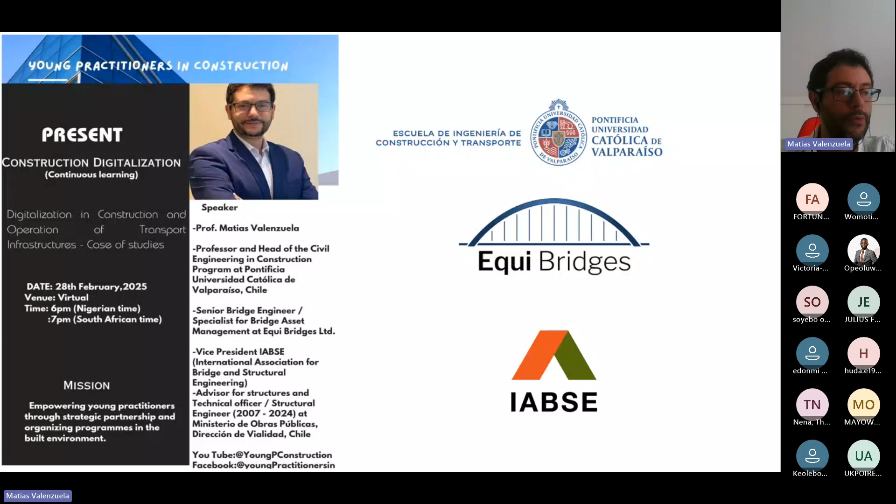So let me start with the development of what digitalization means in Chile. The first thing I can talk about is BIM, Building Information Modeling. And why that? Because, of course, Building Information Modeling is a methodology for collaboration between different stakeholders in construction, during design, and of course in operation. But also you have different software and different technology that you can implement in order to improve the BIM methodology.

In 1975, it started with the publication of BIM. Then we moved to the ISO STEP that regulated all the model. In 1994, I'm talking about all around the world, it started with the IFC development, and in 2000 we started with Revit, and then moved to the first experience in Europe, for example the case of Finland, and in 2007 the US also became part of that.

What is important here is that we are moving in several ways, and collaboration is something important. You can see that in 2018, a mandatory use of BIM, for example, in Spain for public tenders, requires a specific way of being collaborative during construction, collaborative during design, and also pushes the technology a little bit.

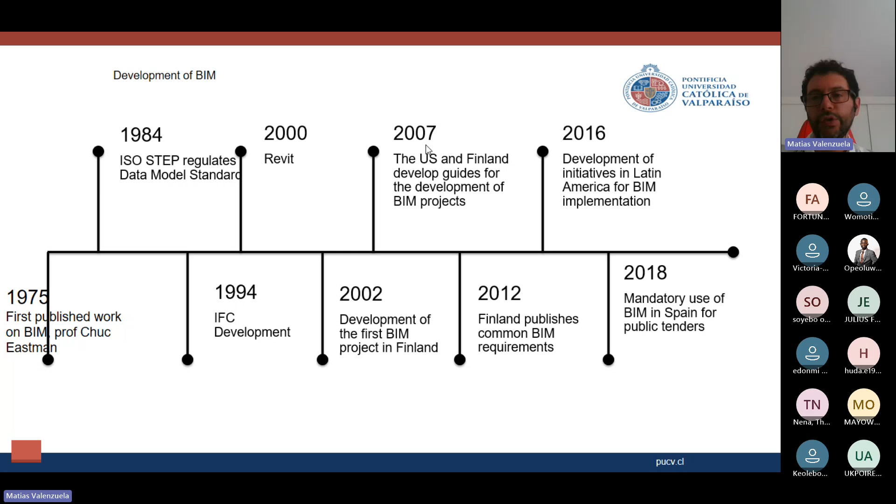Something happened in 2016 in Latin America, because that year we started with the implementation of BIM in several ways. Let me move to this map of South America, and you can see here that we have frequent use of BIM in the case of Chile, that long narrow country, my home, Peru in the north, and Brazil. But it's also preliminary or the first stage of the use of BIM in Colombia and also in Argentina.

That is something that I realized during the strategy of use of BIM in Latin America in 2023.

If we want to know more about this use of BIM, you can see here in this map different ways that you can approach entities or associations that promote BIM in different countries. For example, in the case of Chile, Plan BIM is one of the most important, and this year is the last year for the set of BIM in the different structures. But you can also follow this in the different countries of South America, or in general in Latin America.

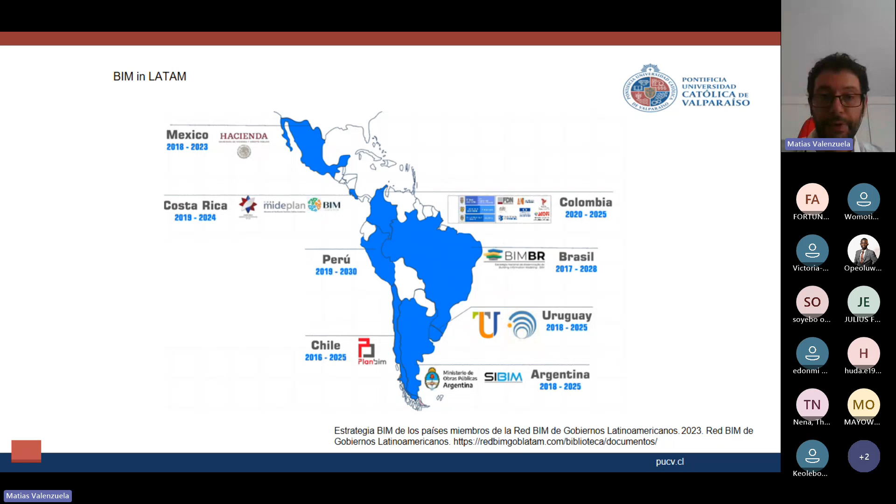So let's move on to why BIM is important, and maybe something we need to connect with the technology, the use of digitalization. You can see here the goals: improve quality and efficiency, increase industry productivity, and achieve savings and reduction of inefficiencies in the life cycle.

That is very important. Life cycle means design, construction, and operation. So it's something we are talking about right now - we are not focused just on construction. If you are in the field of construction, you have to see what happened in design, and also you have to know what happens during operation.

And that is BIM: transparency in information and project traceability, fundamental for construction, promoting collaborative industry, providing better tools for participation, and predictability in execution times and cost control. All of that really, really applies to construction.

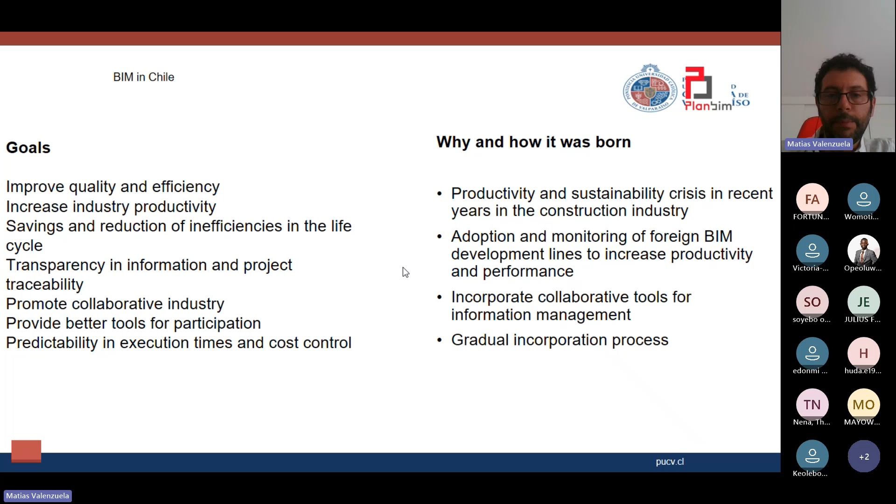So BIM is a methodology that moves us in that direction. Here you can see what happened with BIM in Chile in 2016.

That makes some sense, because the collaboration in construction through technology is something that needs much more energy - you have a crew, a lot of workers who have to be coordinated and have to be taught or trained in order to get all this information.

That is the reason why the current focus of BIM in the roadmap of BIM in Chile for 2022-2025 is to try to implement this in a better way in construction.

So it means that the BIM environment, the collaboration through technology, doesn't only have to be in design, in architecture - it also has to be in construction.

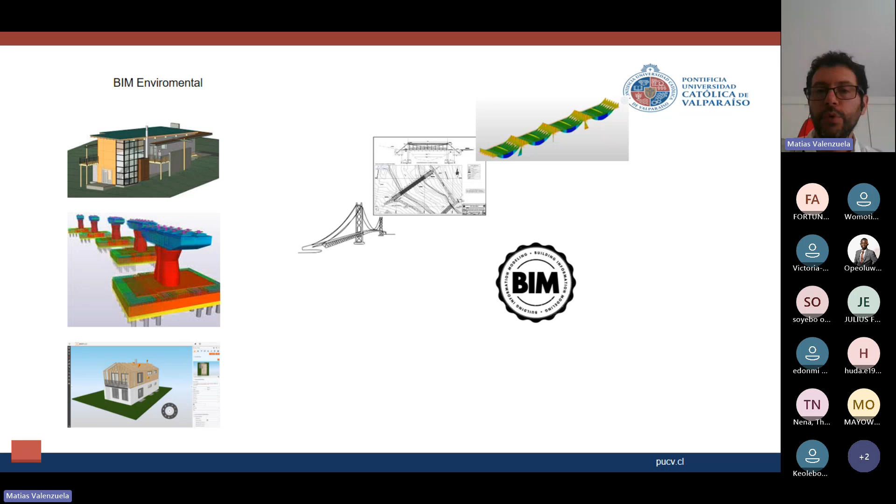So this is the life cycle of the use of BIM and digitalization. Of course, drawings, structural models for design, local model design - yes. Probably then you have started to get some information from that model for construction. Then you have the program, the planning of that. You also need the cost and how we can implement that during the construction phase.

But also the repair - what happened with the model of damage, what happened with operation and the key KPIs of this structure during the service life. That has to be BIM, and that's how we can understand the use of technology.

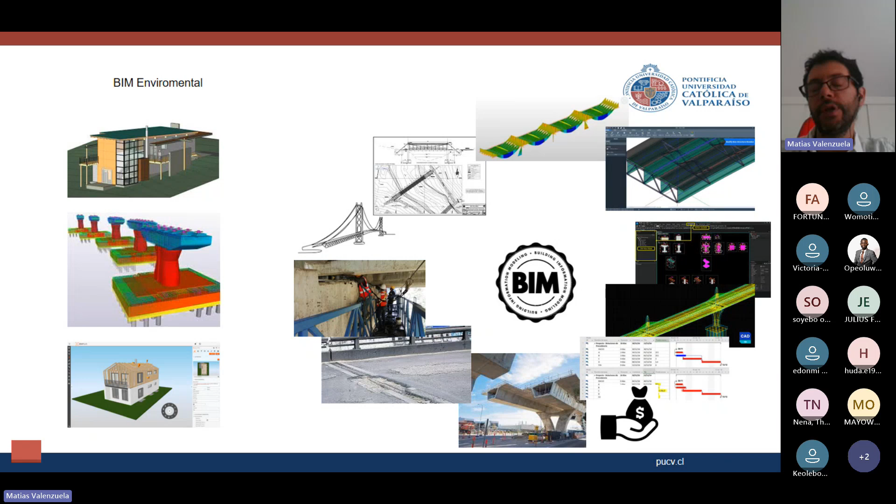We don't need technology just for technology's sake. We need technology for a specific aim, a specific goal. And that is better productivity, a better way for the worker, the designer, the architect, and even the users to understand.

So let me show some case of study, what we are researching right now in Chile about building, about transportation, to link and match between this topic of collaboration using BIM methodology and digitalization, technology, equipment, and so on. So the first step is, okay, what is the most important challenge of this?

The most important challenge is coming from this research. It's research from one of my PhD students, Ali Bihendi, from AUT, Auckland University of Technology in New Zealand, and of course in agreement with the Pontificia Universidad Católica de Valparaíso in Chile.

And the focus is, if we want to move to the enterprise, to the construction companies, and provide digitalization and create a transformation of that, we need to understand which kind of problem they have to implement the digitalization.

That is the reason why this is focused on a human-centric approach for, in this case, the Chilean case study. And this is linked with a national project that is called transference, knowledge transfer of BIM technology for Chilean construction companies.

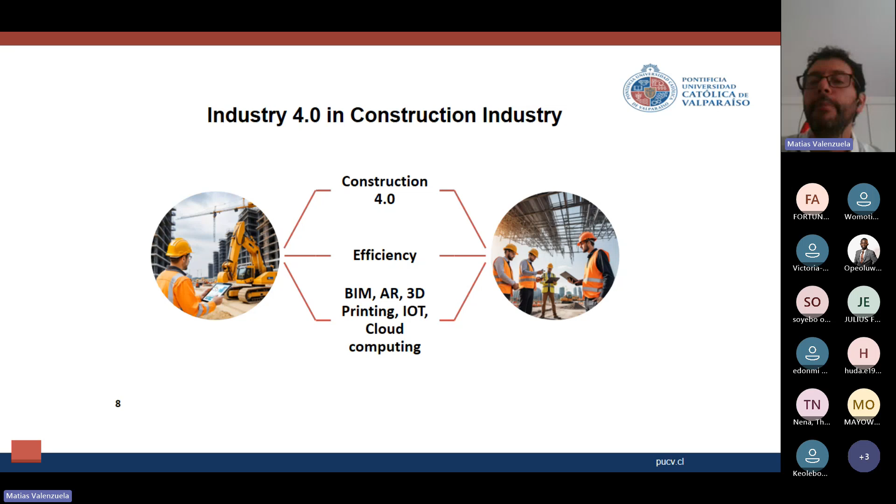And that means we are talking about Industry 4.0 in the construction industry. We are talking about efficiency, and we are talking about BIM, augmented reality or XR, 3D printing, IoT, cloud computing, and much more. So how can we use that, how can we implement that?

So it means an implementation challenge, because I'm coming from Chile. Chile is not a developed country. We have a limited budget. We have several problems getting this kind of technology and implementing it in all of our companies. It's not something that can probably happen like it does in the first world, Europe, US, probably.

But in our country, we have to understand how we can implement it in a cheap way, in an intelligent way, in a smart way, you know.

It is not easy to implement as best practice. All the concepts that have to be included, waste of money—look at that, 900 billion wasted in 2019.

What happened with another important thing, fear of being replaced? As I mentioned, what happens with, in our case, the engineer, the workers of construction—will we be replaced by robotic digitalization, or will we provide a new skill that has to be provided in the sequence of construction? Probably that is the right direction.

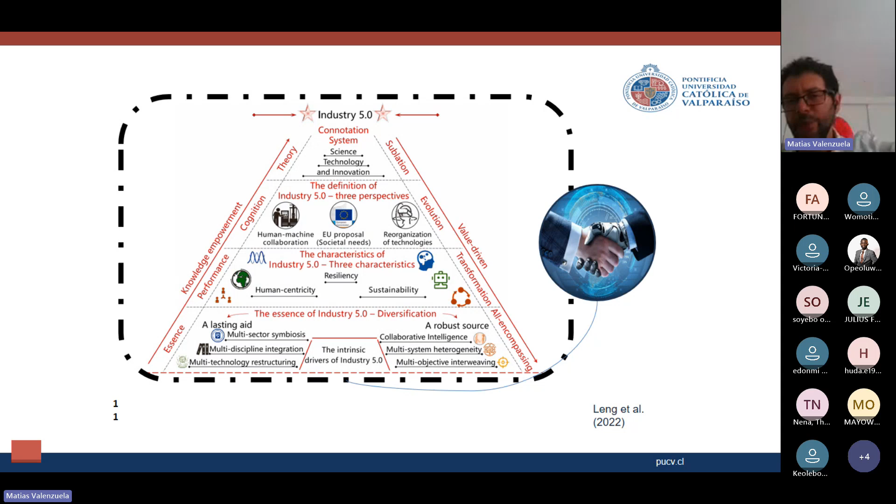So that is when we're talking about digitalization, but there are many words here, many concepts that we have to analyze, of course, and the idea is to simplify that.

And if we try to move in that direction, the state of the art is something you have to know. For example, the different ways that we consider our society: sociocracy, the human-centered organization, human-centered design, and humanistic management. I can provide here several references.

And of course, you can move deeper in that way. So the need for a new approach means that we have to make a change in the way that we normally use and provide the service of construction, and understand that that will happen.

And the change means change management—how we manage that change inside my construction company. The leadership is moving, is changing, is challenging the leadership, and a comprehensive guide for construction organization leaders.

That is something we are focused on right now in Chile and New Zealand in this collaboration, in order to provide guidelines for all the companies. We are moving in a way where organization change management has at least three branches: the current state to a desired future state, the most suitable change model, and the support of leadership in this change management.

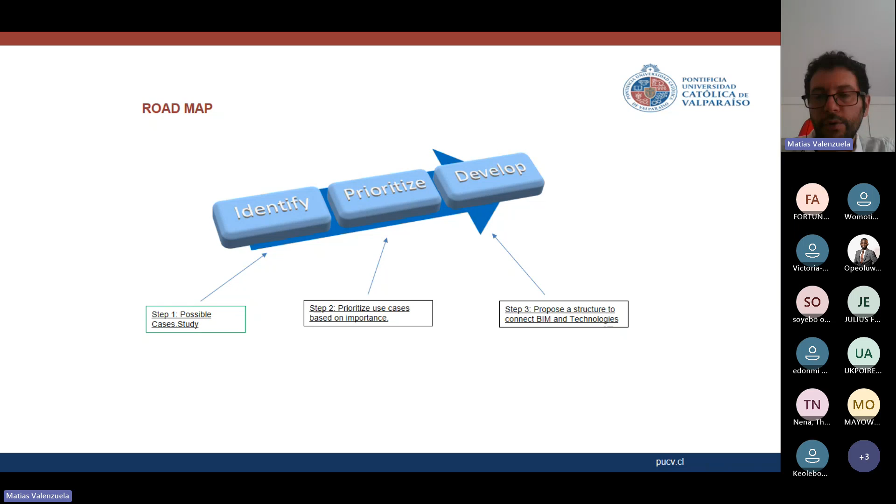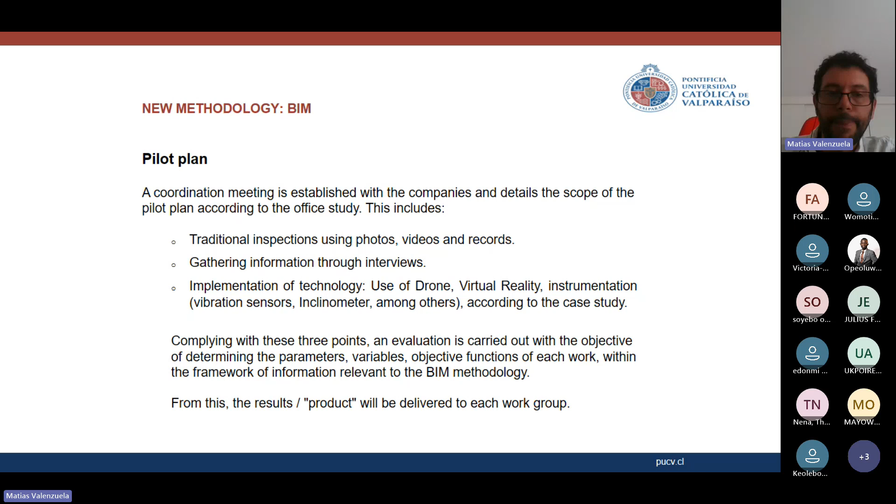So after understanding that, they used BIM for the modeling, 3D modeling, and used this during the construction. We implemented a detailed LOD 500 in a way to recommend improving not only the design and architecture point of view of the use of BIM. So moving there and going to the construction stage, all the work in terms of critical path and execution times was part of the important issue here.

Which other important technology did we implement? Construction and topography survey using drone - that was also included - and also the implementation of mixed reality. And that is part, of course, not directly for construction, but also for sale or post-sale, meaning how they can show the result of this construction process to the final client.

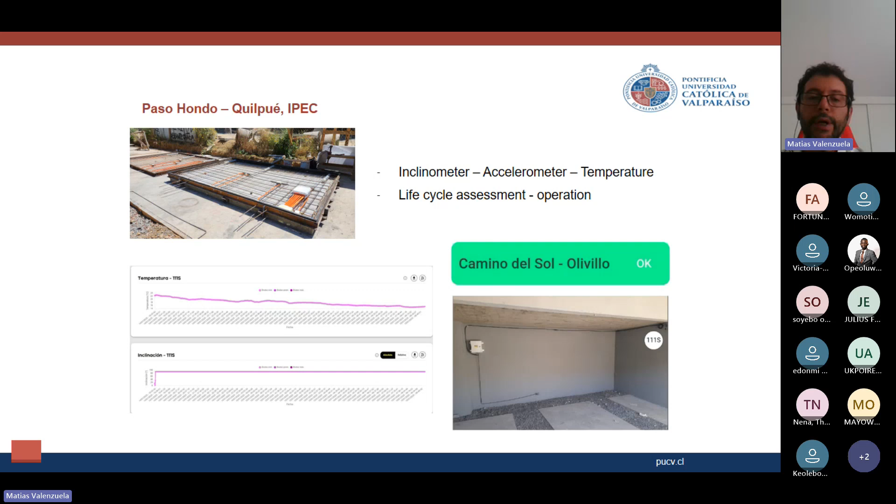Here you can see the different graphs that can be implemented. This could also be included in a domotic way, meaning it could be information provided for the user, or for construction management or operation management.

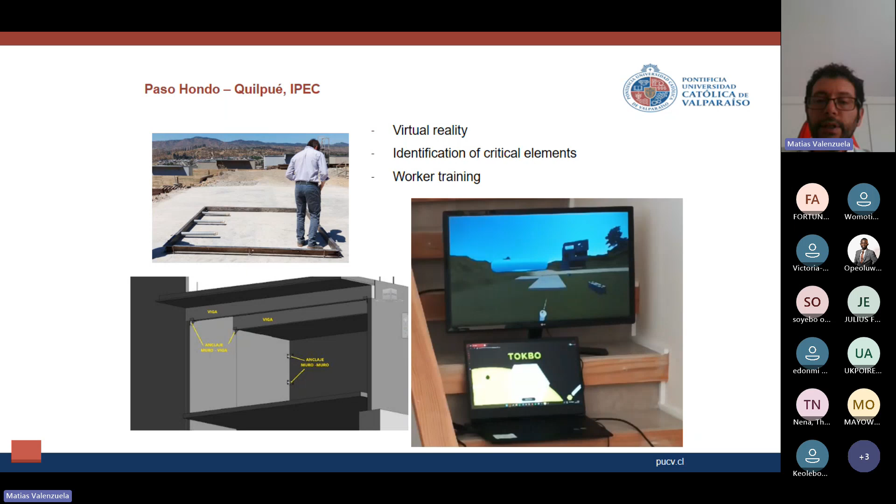So that was very useful, and probably something that should be considered for new workers at that stage. This is another project, for a building.

So the way we could improve the use of technology for them was of course through a survey, analyzing the problems they had during construction, and we recommended using a tablet-type mobile device including the BIM file, a BIM viewer, with an LOD 300 level for that.

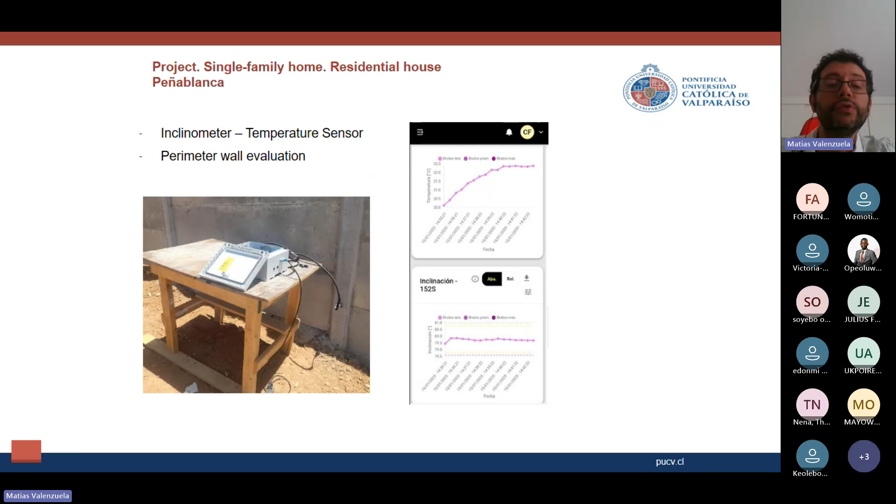We also use a temperature sensor in order to analyze if the environmental condition could also affect the inclination data results. We also used virtual reality, but in this case it was not really used for the construction stage. It was much more focused on trying to resolve the interference model, for example electrical or piping models, and showing all of that specific detail to the customer, the final client.

So the next stage, which will be during this year, is absorption. This year we will follow up with this project, and we will try to provide much more information to this company, and provide them with new technology.

For example, in this case, we are using this kind of integrated sensor. Of course, we are using BIM modeling software; in this case, we are using Allplan. It's a very nice and comprehensive software for BIM Plus, for operation and also for drawings. We also use drones with RTK workstation.

Okay, that is the first stage of my presentation, and right now I want to move in the minutes that I have left to the infrastructure.

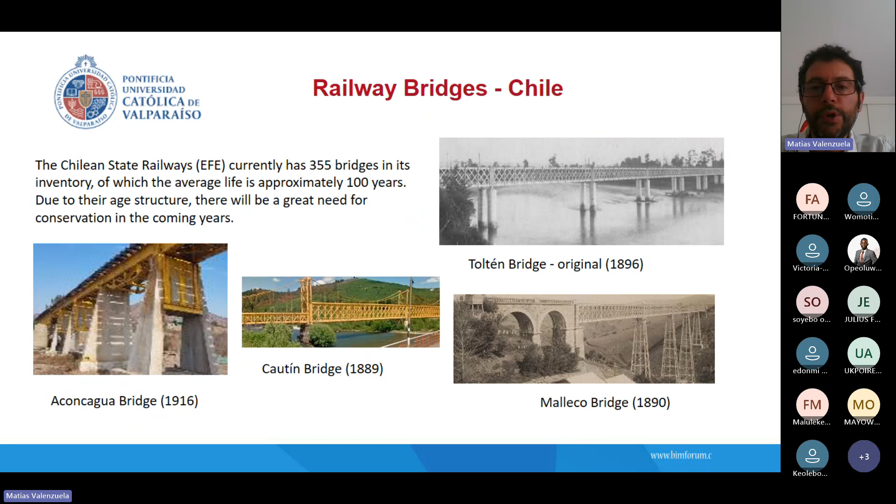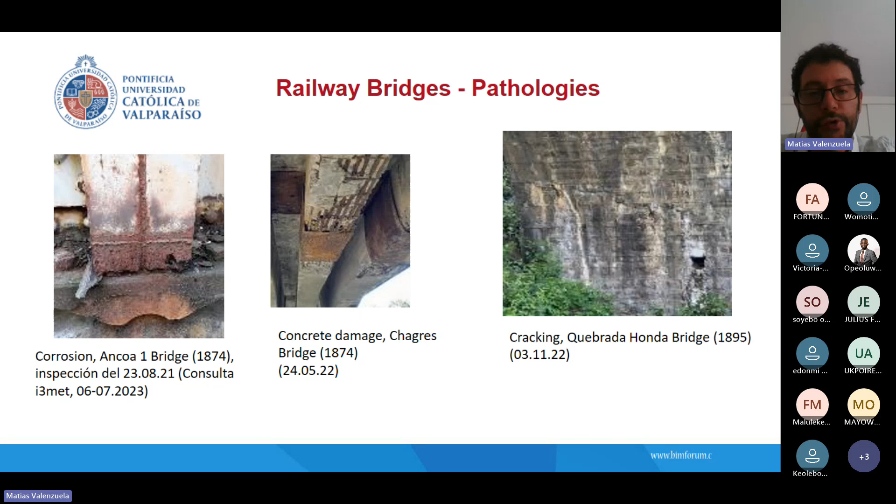Corrosion, concrete damage, cracking. So what happened from our side of construction, if we are talking about all these bridges, all structures, how can we provide our support from the side of construction? Of course, it's from rehabilitation, strengthening, and repair projects. In that case, construction is also part of the life cycle, in this case the operation.

So understanding that, and following our ideas of how we can implement technology and digitalization in this kind of problem, we were awarded another funding project. It's called Fondef IDEA 2024, Bridge Damage Monitoring and Prevention System based on a prediction model generated by artificial intelligence.

My acknowledgment for the team: the director here, Ricardo Soto, he is an informatics engineer. Also Alvaro Peña, he is from the side of mechanical soil. And you can see me here, I'm a researcher of bridges and sensors and all the stuff. And we have three PhD students, Jose, Marcelo, and Juniel, supporting all of this research. So I acknowledge all of the team.

When we started with this project, we talked about which are the research lines. So we focus on three clusters. The first cluster is artificial intelligence and data analysis, of course led by our informatics team. Early detection of anomalies, prediction of structural problems, and maintenance optimization.

The second cluster is Internet of Things. So how we consider data acquisition, continuous and real-time monitoring, which kind of sensor we are using, efficient data communication, advanced data storage and management. That is another focus that we analyze in this research project.

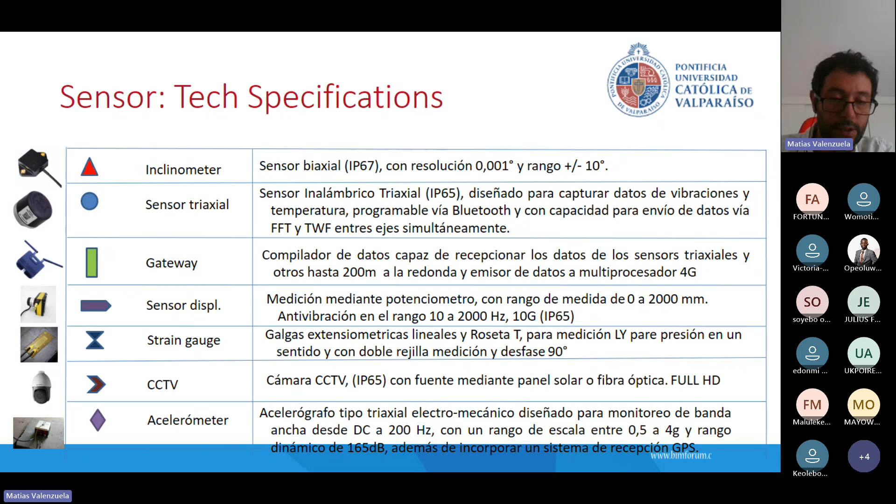Right now, we have already implemented just the accelerometer. And that is something important for Chile because one of the main issues here is earthquakes, and the bridge that we are using as our case study suffered a settlement due to earthquake solicitation.

But when you want to provide the right digitalization using sensor technology, you cannot just say, okay, I want to use an accelerometer, so use this specific accelerometer. No, you also need to understand and link the sensor, the technology, with the KPI, the key performance indicator that you want to measure.

So, for example, in the case of the accelerometer for our project, it is to analyze what happens with the soil acceleration, the mechanical soil acceleration, and also to understand the different modes of failure that can occur in this bridge. So this is a really important recommendation: if you use technology, you always have to identify the KPI and the target that you'll use.

This is an example of the location. Of course, this is not specific to this project.

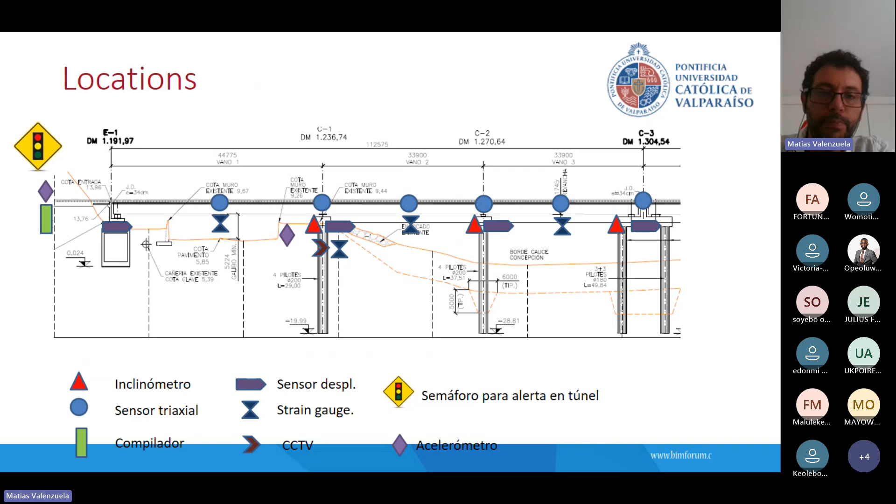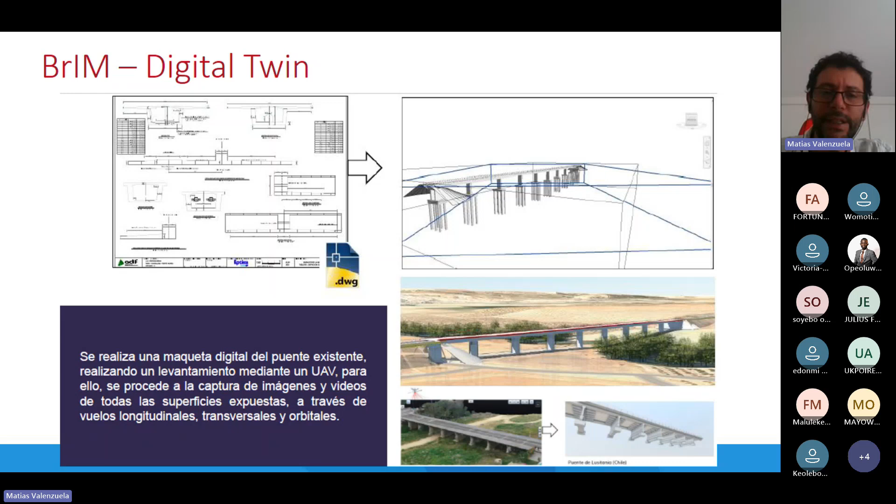It was a road bridge project that we implemented in the south of Chile. And of course, BrIM, Bridge Information Model, is something that has to be considered in this research project, as I will show you in this next slide.

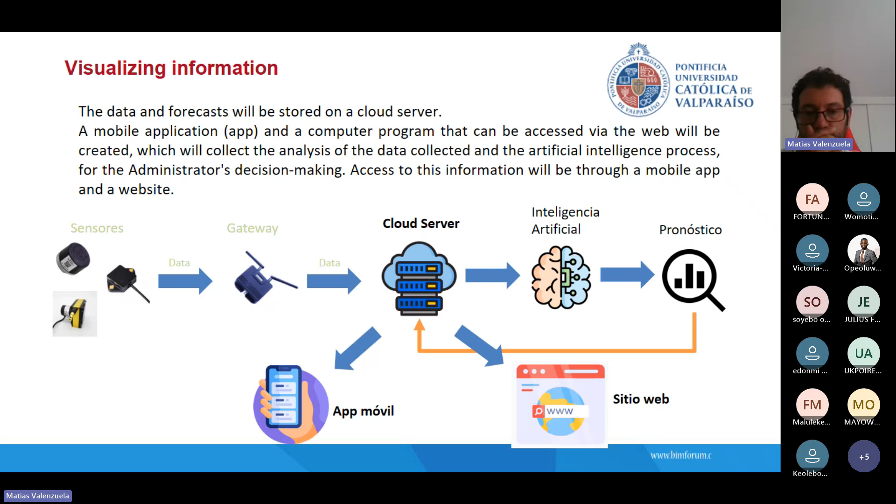Following this research project, we implemented this in a digital twin, BIM, and XR visualization at Las Cucharas Railway Bridge in Viña del Mar. Beautiful place here, a touristic city, a beach area, very beautiful here in Chile.

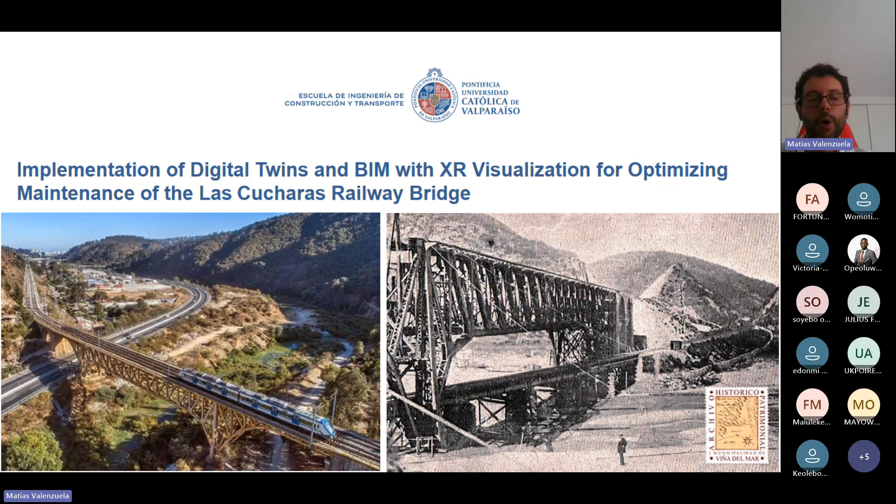Here you can see the survey visit used for the digital twin. Of course we need to go there to understand what happened with the different elements. In this case, the bridge is considered a viaduct with an arch bridge, as you can see in this photograph, and a truss bridge is the main part, the main span.

Here you can see our inspection in the railway area, in the bearing zone, and also close to the river. We used a drone for the digitalization, a DJI Phantom 4 RTK with a Hi-Target V30 Plus and controller, and Trimble for the scanning. Here you can see the preliminary result of that.

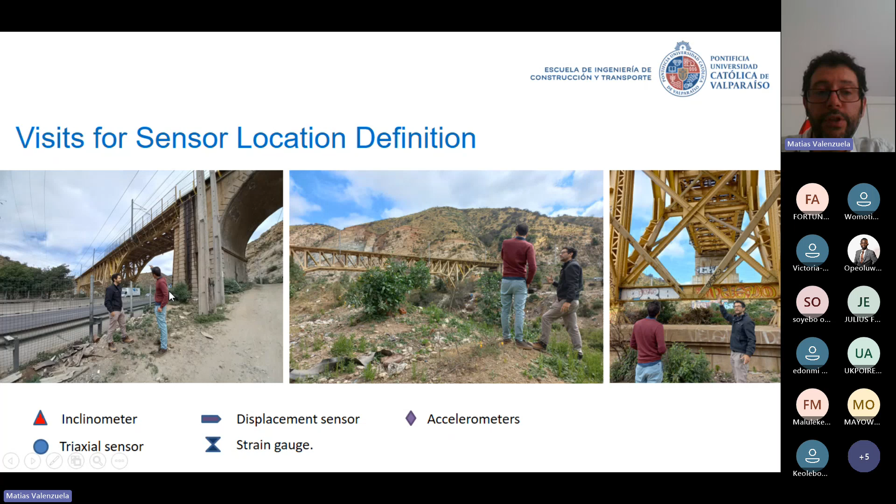We also had a visit for the sensor location definition here with a colleague from UPC, Barcelona Tech, Spain.

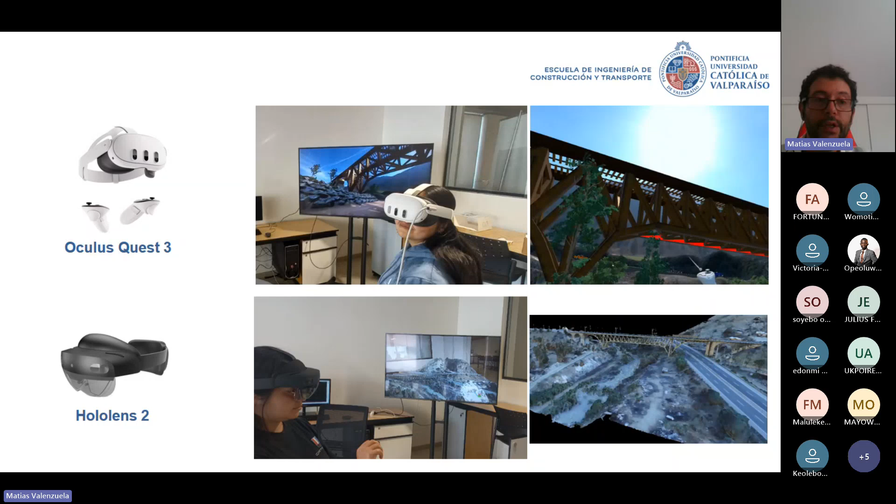And here you can see the gamification, which provides the virtual reality for the training of the inspectors. We use Oculus Quest 3 and HoloLens 2.

We created the digital twin with the first model using a photogrammetric survey, Metashape, Blender, and Unity. This is the second analysis, and the third one also with the topography.

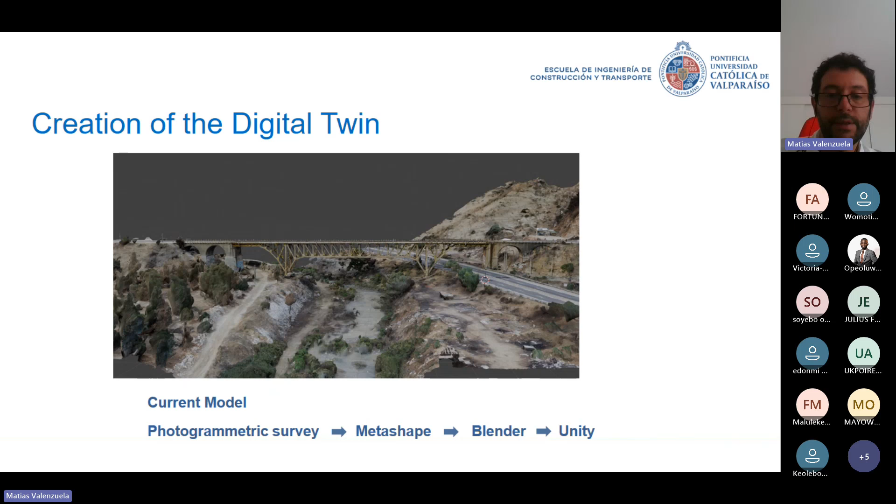This is really important for us, for example, for climate change, to analyze any kind of potential problems coming from the river, from scour, erosion, fires, or landslides, for example. So you can see here this.

The interaction with the digital twin also includes a route for inspection and gives specific training for the inspector with information about the drawing, information on how they can take photos, and information on how they can be safe during the inspection, for example, if the train is coming, and so on.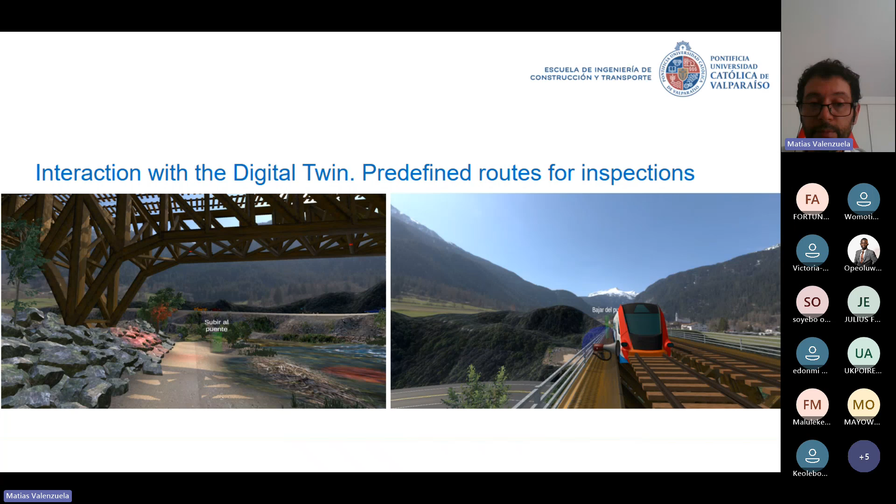Here you can see a specific location of the bridge. Also, there's an avatar, it looks like me because they used my face for doing that. And we talk about the different stages of the training.

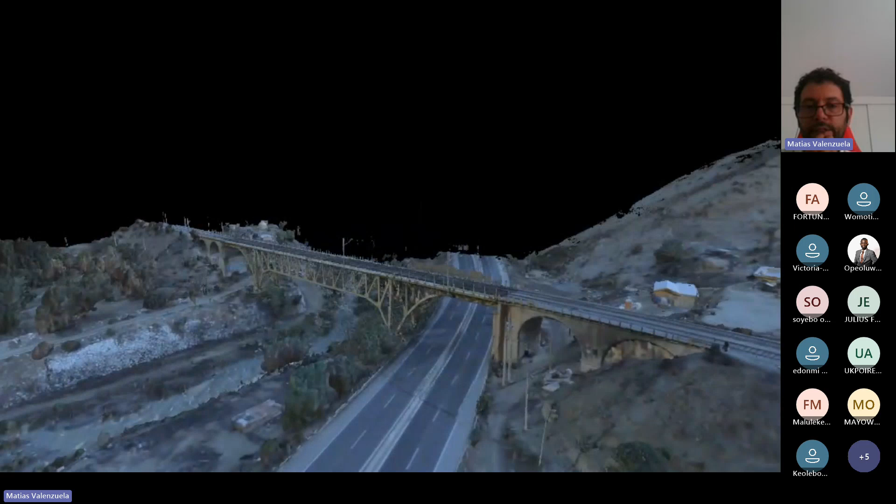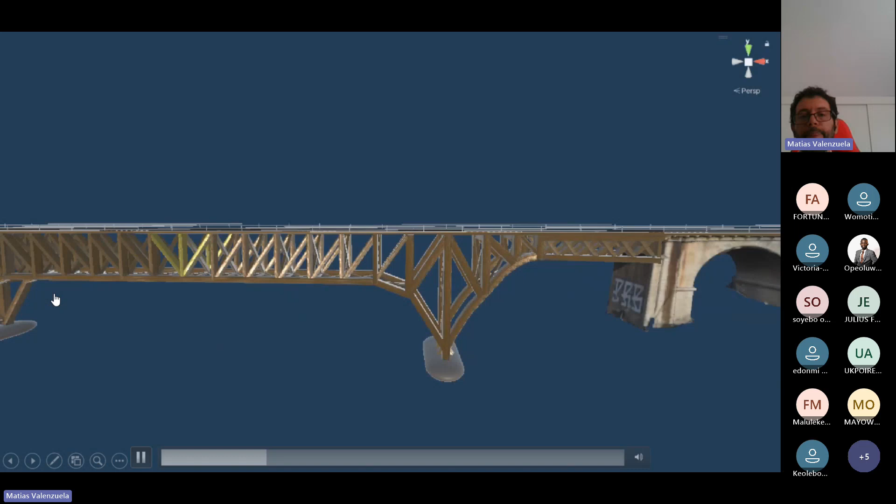It's very interesting, this bridge, because it overpasses the highway, but also it's over the river, and also over a local road. This part that is showing, the abutment, one of the abutments had some problems, and that was strengthened during the first decade of the 21st century.

So here you can see the model, the general model. We tried to identify also the environment, the conditions of the forest, the river, and even the use of the bridge, as you can see there. We used this kind of icon to interact with the inspectors in preparing beforehand. Look at this.

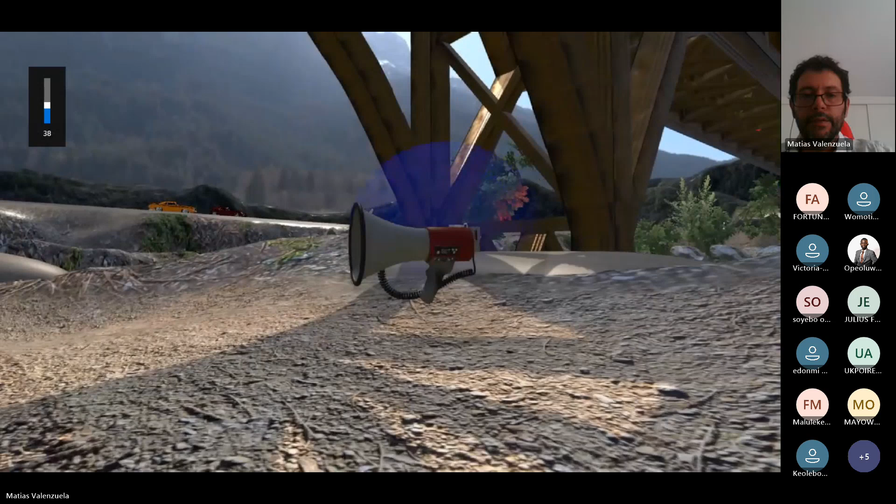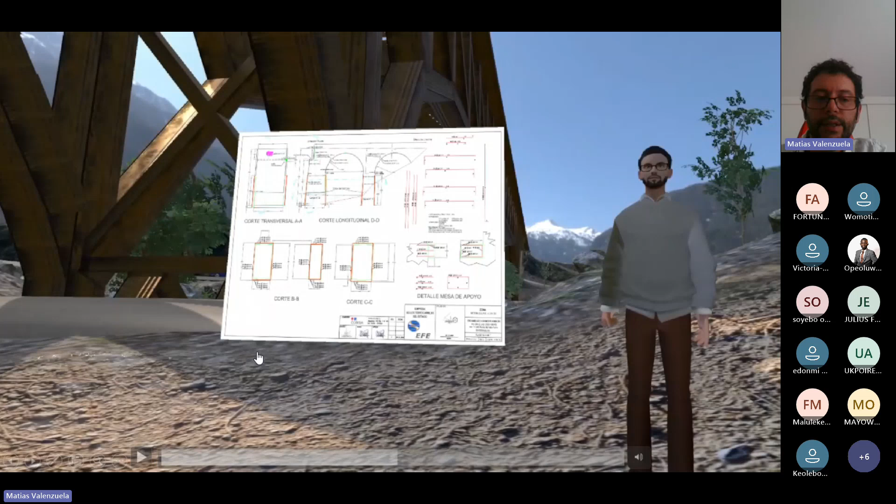That was, of course, in Spanish, and I want to say that it's shown a specific location, the drawing, and what he said that a specific way that they can approach and make the inspection of this element. So that is the way that we are using the training.

It's also included information about what you can see and how you can follow with the inspection. I will move a little bit faster just for time, and you have different areas for doing that. Let me continue from this side.

So it's important also the different location, and that was the information that had to be provided during the training, and also the ways, the roads that the inspectors can use this virtual reality, is a freeway, or also you can move from a specific shore and then move to the other shore, to the opposite shore, or if you want, you can go upstairs, go up to the bridge.

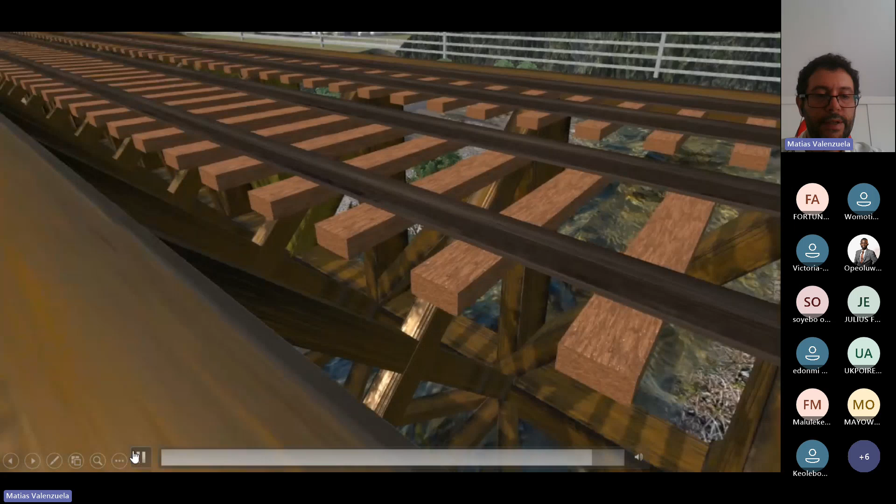Look at this, this is go up to the bridge. So then you go to this platform, and then you move to that position. Okay, that's it. Oh, sorry, just I want to.

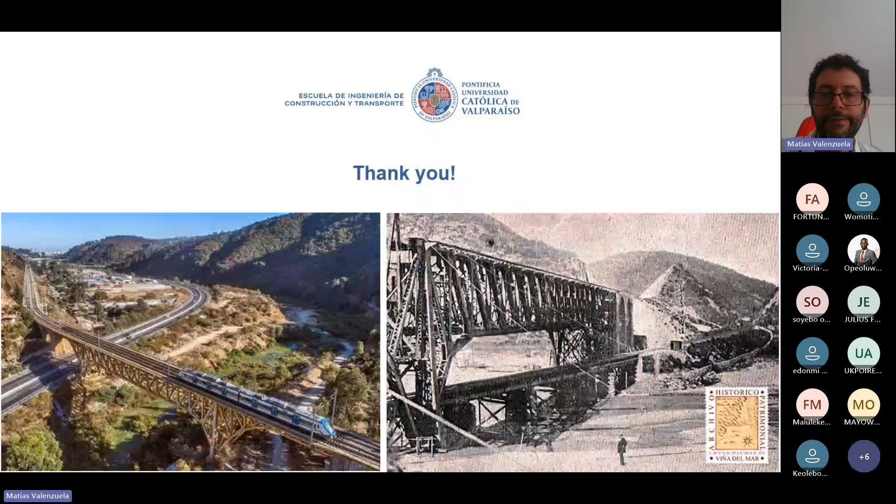Okay, I think that I have just 5 minutes more, so I want to show you the last part of my presentation. I'm sorry for a little bit of the delay, but I want to talk about something that it's important: how a company can make the digitalization and work in a global way.

And that is the reason why Equibridges decided to make an international collaboration. So several of the team is located in many places around the world. For example, in my case in Chile, or in Africa, in Zambia, Ernest Kakoma, he's a master's degree engineer and also a modeler. He's part of Equibridges, but he's working from there.

Even more, that provides this kind of flexibility, gives the opportunity to contribute in a different project using the research. In my case, the research coming from the university in Chile. In the case of Africa with Ernest, he is involved right now in research in the field of structural fire engineering at Stellenbosch University in South Africa, for example.

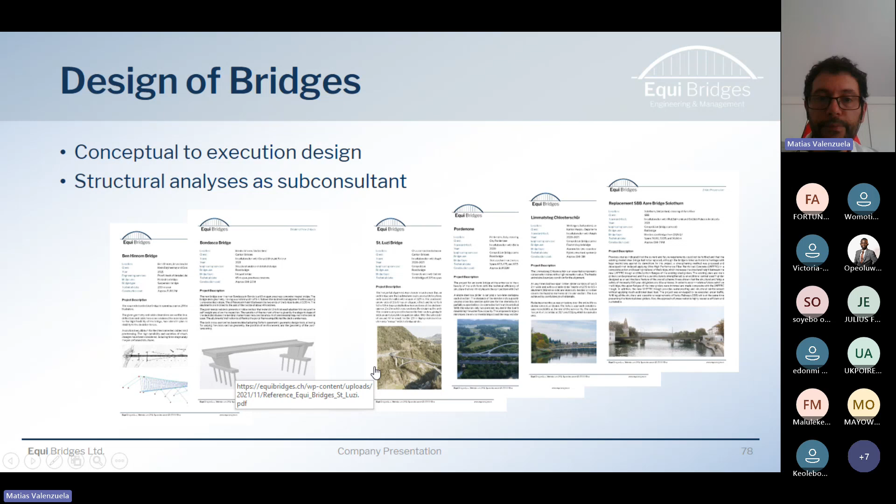Proof checking, quite the same. So proof checking, the reviewing of drawings, is something that it's important. So all the platform is available in South America, in Europe, and in Africa to analyze in a collaborative way, for example, the proof checking or the review of the drawings.

Also give some support for the codes and guidelines, and that is really interesting because Equibridges, for example, inside of the cloud, has what's considered the e-library. It means that we have all the storage of information, codes, and guidelines open for all of our collaborators. And that provides the possibility to give some support to owners, ministries, or municipalities, because we have a very huge e-library.

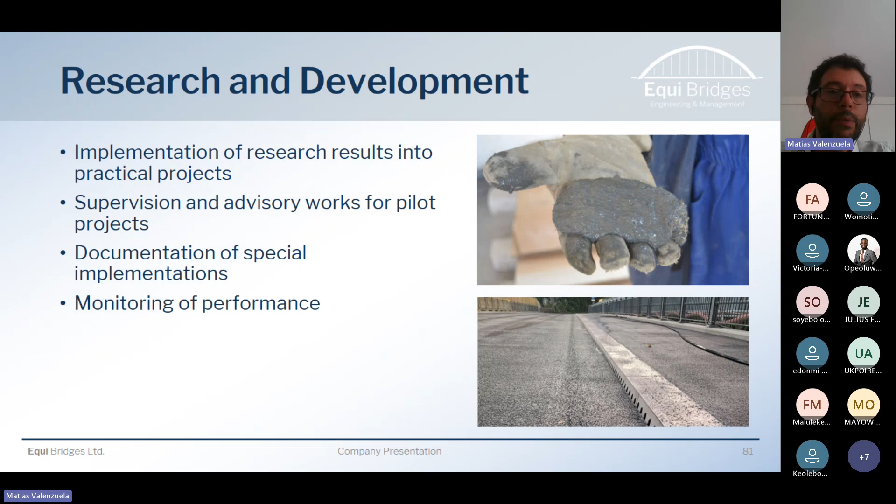The research, as I mentioned, and development - interesting or important things that we are working on right now. It's, for example, in the side of construction, the use of ultra-high performance concrete that was used for rehabilitation, repair, or, for example, the monitoring of performance, that also is part of our research and development. But one of maybe the most important areas is BIM, digitalization of archive information.

But it means not just scanning the information; it's trying to include the information in the BIM model. So that means that if we have a BIM model, a 3D model, and we have a specific element, for example the reinforcement here, you can click there and you can get all the technical information, even if the bridge is old, with no drawings or no comprehensive information. So the idea is to try to complete that information, research about it, and then implement it in a standard way. Also, the BIM to field - this is really important.

BIM to field is a very nice concept: construction without drawings. I mean construction not using paper drawings. We use the tablet, the working station, and that means the worker has a new challenge, to understand and know how to use this digital drawing or digital 3D model information.

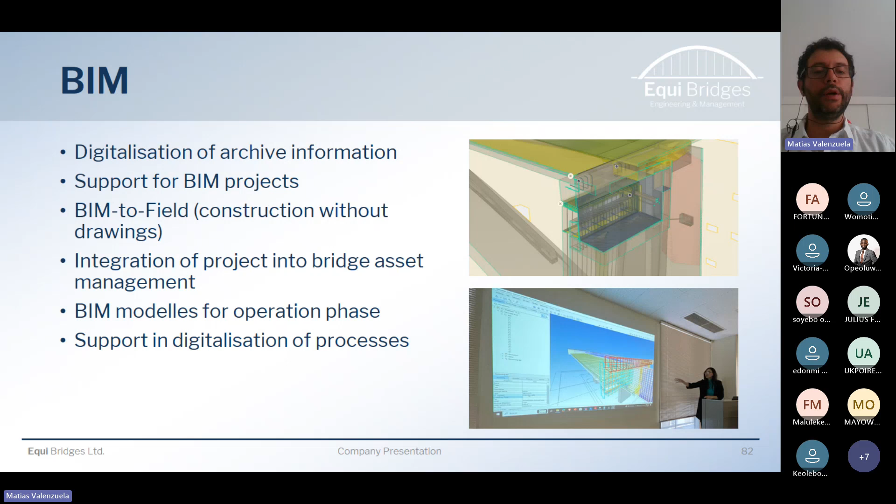Another important issue is the BIM models for operation. As I mentioned, we are talking about life cycle, not only construction, not only design, but also operation. That means bridge asset management in the case of Equibridges, because we are focused on bridges. But if you have a condominium, family buildings, or another structure, you can use this asset assessment management, building assessment management, or industrial structure assessment management.

And of course, the interface between bridge owner and transport company, using IoT or other technology, for example to identify heavy transport, heavy trucks, or oversized trucks that could be a problem in the road network.

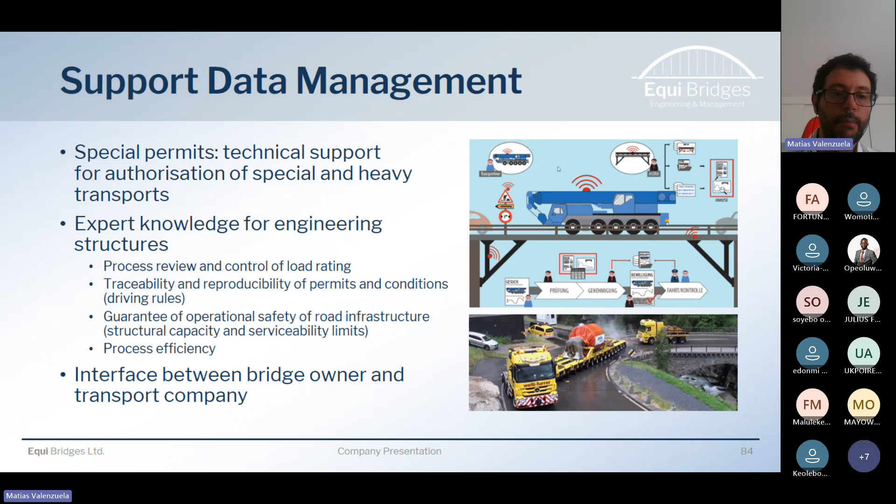We are also focused on bridge design with short courses. In Zambia, in Lusaka, in 2023, that was our first activity. 2024 was in Japan, in University of Kanazawa. And at the beginning of this year, in January, we had the Allplan and digitalization course in our university here, in Catholic University of Valparaiso, and we are open to other places.

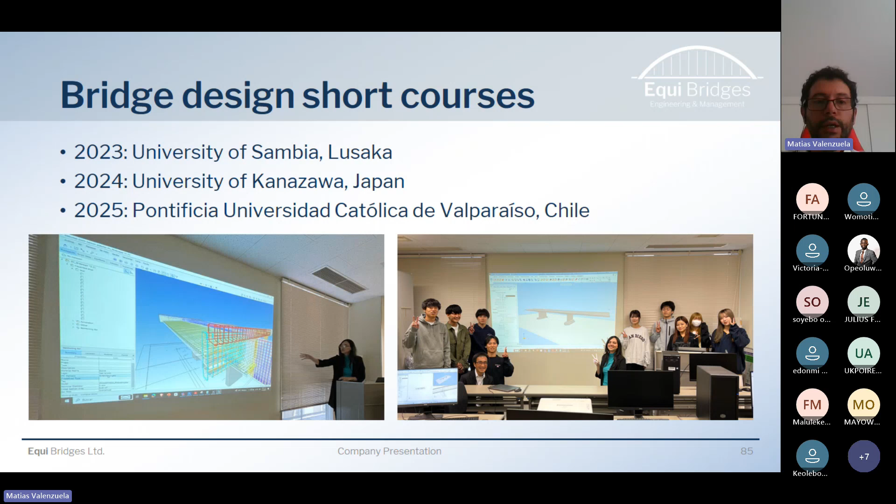Allplan is our software. We use the expertise of this model for bridges, focusing on 3D design of reinforcement layout, BIM models, and representation of that. And we use a common data environment, CDE, for the projects.

For design, Sofistik is our main software, and we try to link it with the BIM construction model. We use Sofistik specifically because it's a very nice software for construction stage analysis, and that provides support also during construction.

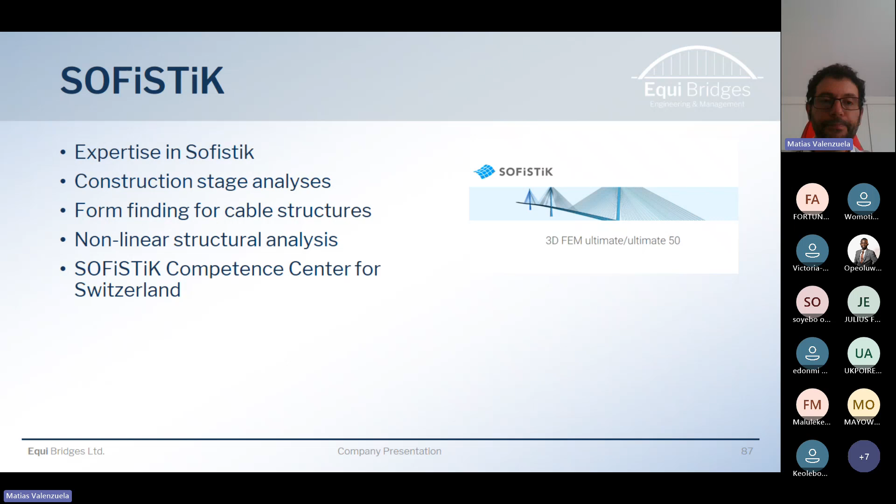So just to finish, I want to show you one or two examples of the use of this knowledge of Equibridges in a real project.

This is a Swiss BIM pilot project for existing bridges. We used rehabilitation of a historical bridge through UHPC, ultra high performance concrete. And the most important issue is that we use a digital planning workflow and BIM to field.

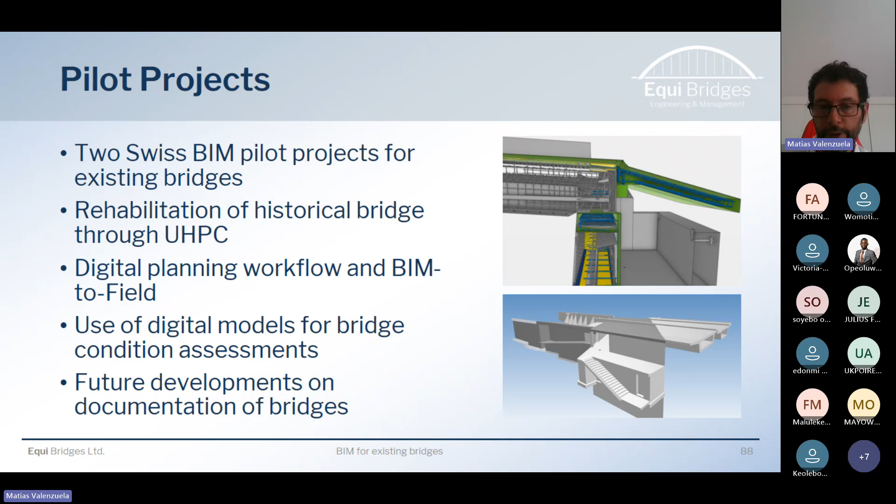So the first one is Maillart-Brücke Aarburg, a rehabilitation bridge. This is the bridge here. We provide the rehabilitation of the bridge deck using this ultra high performance fiber reinforced concrete. That was the first BIM project for rehabilitation that included BIM to field.

The idea was to use the BIM model compatible with the bridge asset management database, the bridge management system, with a special focus on the rehabilitation, also in the new drainage system, because there was some problem of waterproofing.

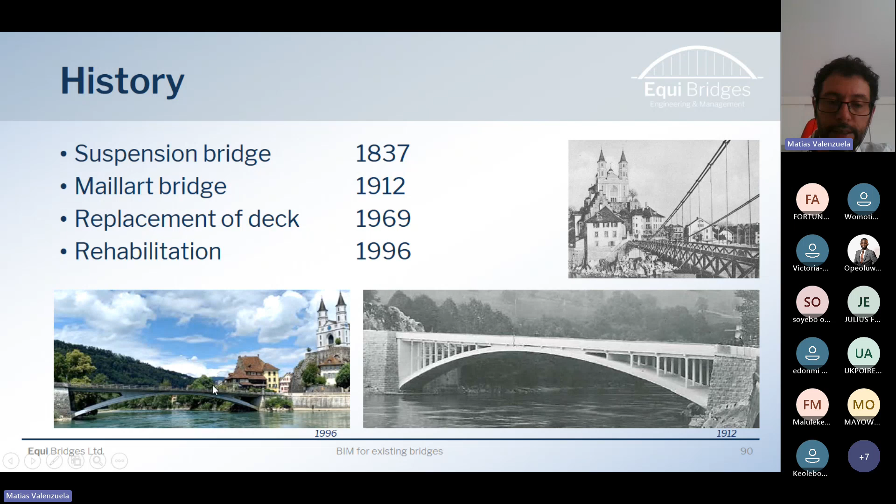Some photographs from this bridge: since the first one in 1837, the replacement of 1969, and the rehabilitation in 1996. So after that, this is the bridge in 1996, and the rehabilitation that was done in this 21st century.

So the initial situation: missing waterproofing, transversal pre-stressing, and chloride that was identified. So lack of structural resistance of the sidewalk in this area and this area for the pedestrian.

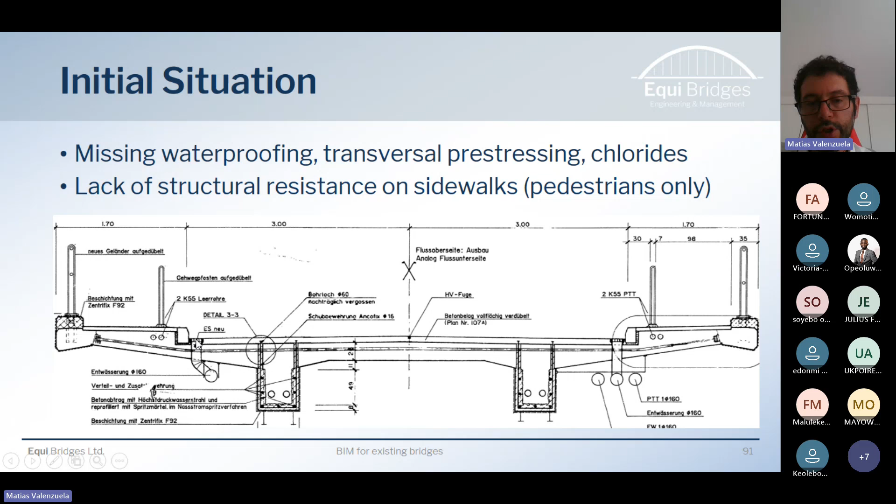And this is the drawing, the blueprint if you want. Not really so much information, and also we needed to analyze what happened with the drainage, because you can see here that the drainage, all the water goes directly to the main girder.

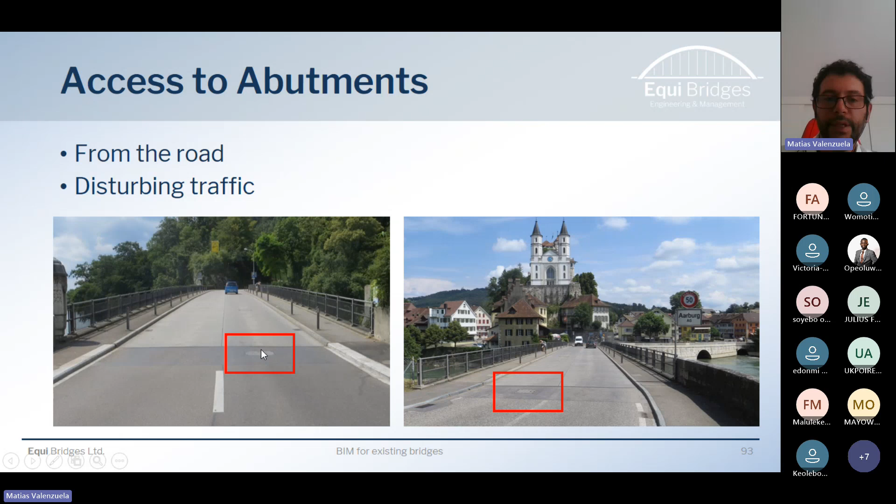So two huge problems. And the other problem is that the access to the abutment was not really good. You have to go inside and analyze the abutment, but you go through the center of the roadway, which makes it disturbing for traffic to analyze. It means special conditions: high amount of heavy traffic, narrow roadway, difficult to cross.

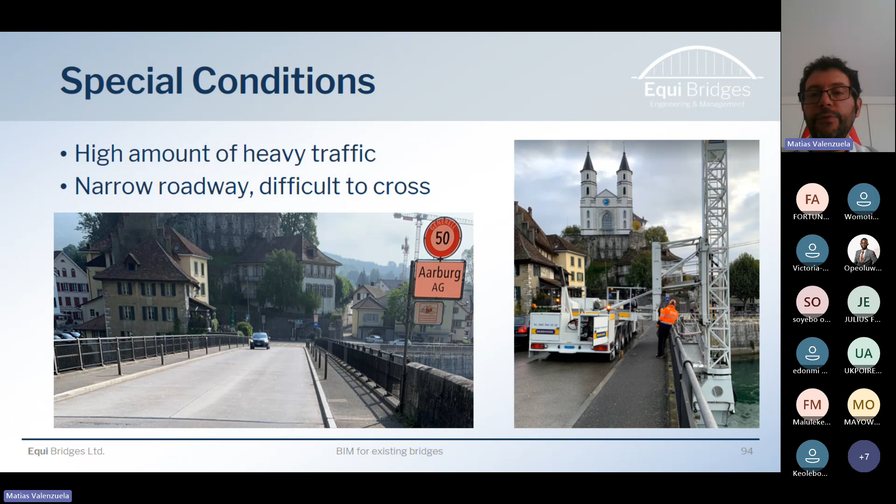So that means we had to prepare a comprehensive plan for construction, in this case a rehabilitation project. The project scope finally covered waterproofing and strengthening of the deck, reconstruction of the bridge decks, and combined cycle and pedestrian lane.

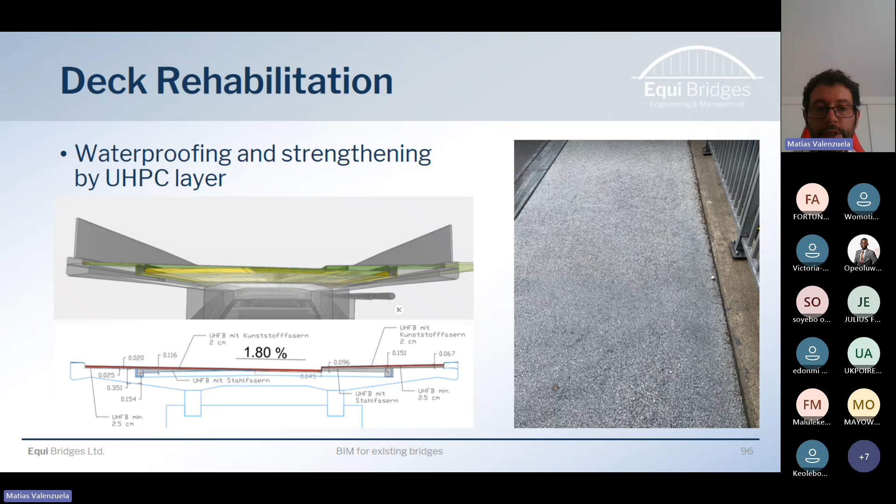And you can see starting to see the deck rehabilitation, the waterproofing and strengthening using a UHPC layer. And here you can see the 3D model of the bridge that was carried out by us, by Equi Bridges, which also provides the drawings.

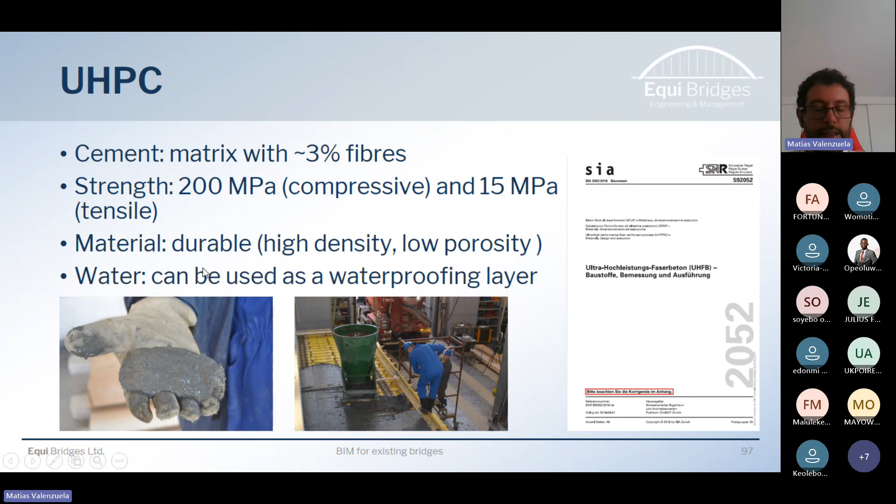We use UHPFRC, ultra high performance fiber reinforced concrete, in this case with a matrix containing 3% fibers and a strength of 200 megapascal. That's not really so important in this case. Much more important is the 15 megapascal tensile strength, and it's important to understand that under 7 megapascal the waterproofing is excellent with this material. It's very durable, with high density and low porosity. That's the reason we used it in this case.

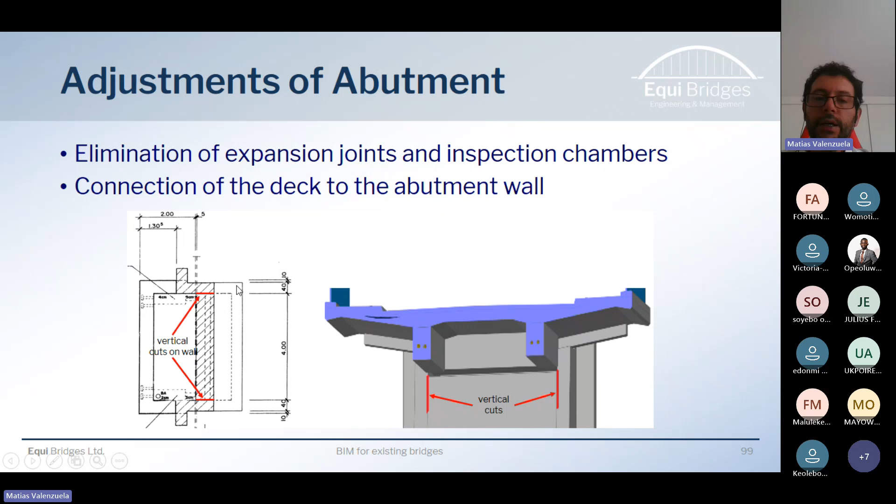For that, they needed adjustment of the abutment, so we eliminated the expansion joints and made a connection with the abutment. It's a semi-integral bridge, and you can see in the model that we included that as a new structure. Look at this. This is the model, easy to understand the way we connected the abutment with the structure.

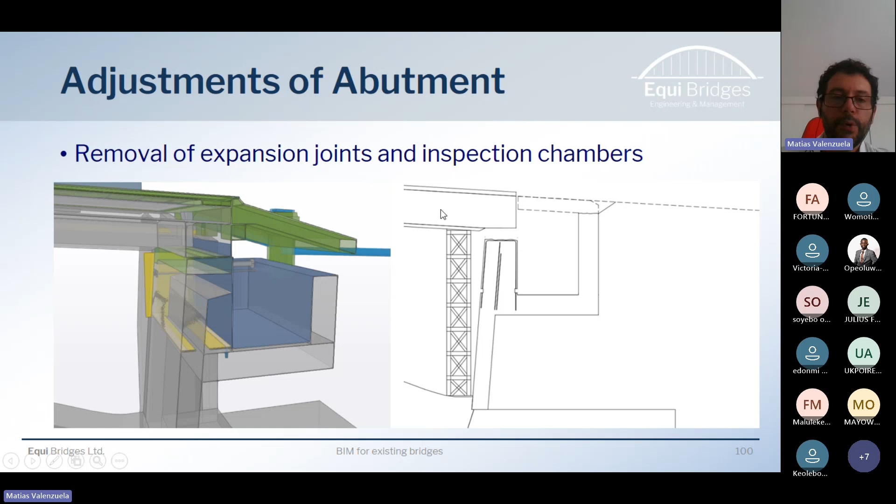Also, we use an approach slab to reduce the settlement of the approach road of the bridge, plus elimination of bearings and specific detail of reinforcement. This is quite easy, in my point of view, for the constructor or worker, to understand how we can implement the different reinforcement, the rebar.

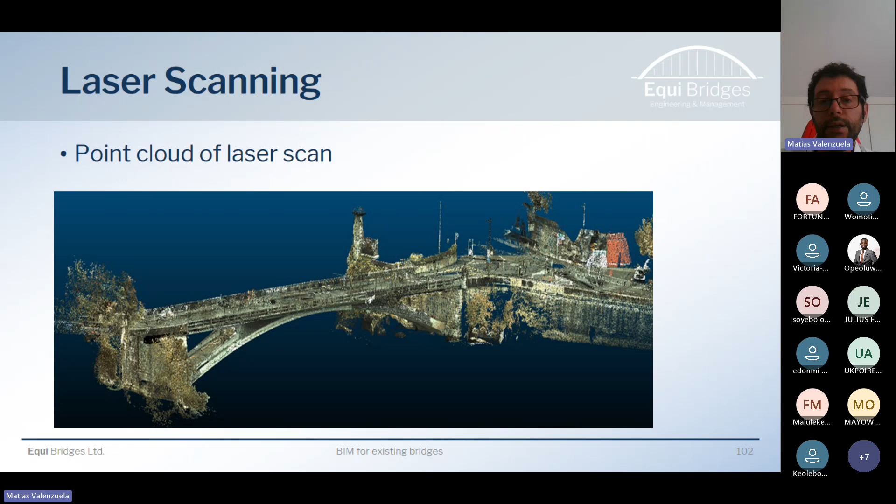Also, in the methodology for the BIM models, we use 3D visualization. For example, if we click on a specific element, you can get all the information: the volume of the element, the height, the length, which code is used for the specification of design or construction, and so on.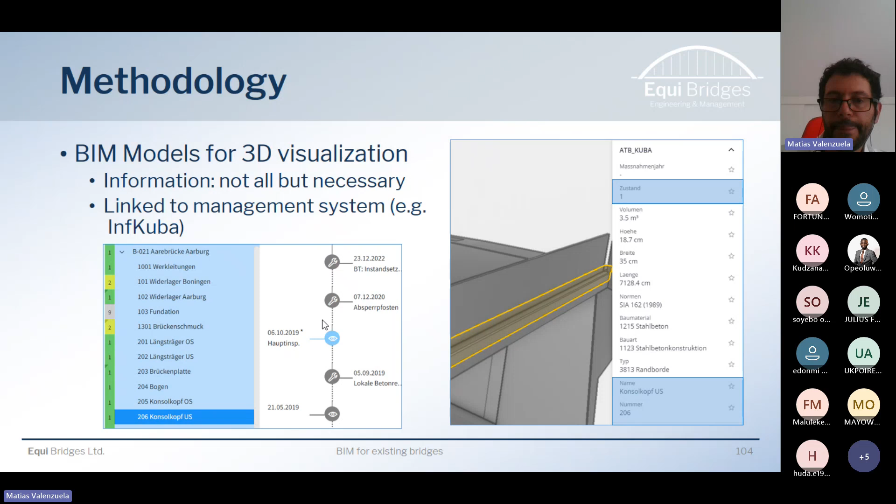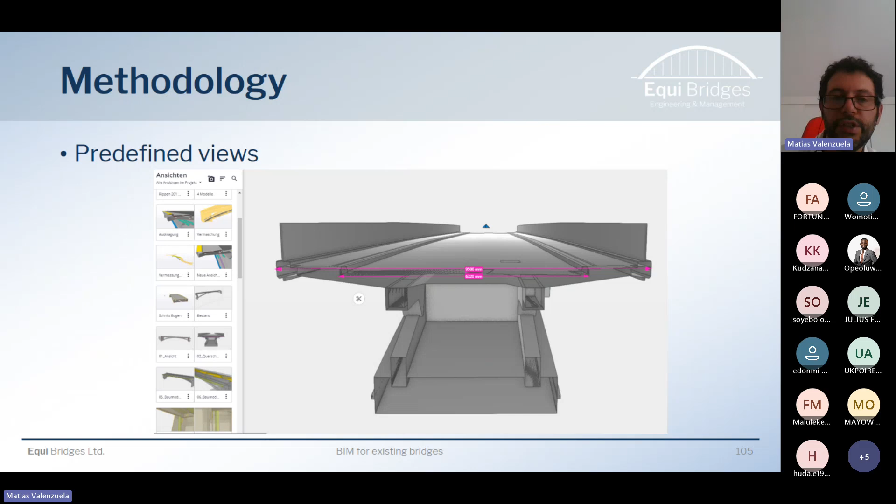Predefined views are also used. For example, if we want to show the worker a specific detail of the rebar of the UHPC, we predefine this view, and if they go to the workstation or use the tablet or BIM viewer, they can see the specific view that we, as constructors or construction engineers, want them to understand.

All of that methodology automatically generates information including a reinforcement list, a bill of quantities, submodels for information exchange such as formwork, construction program as a property, inspection and control plan, and so on.

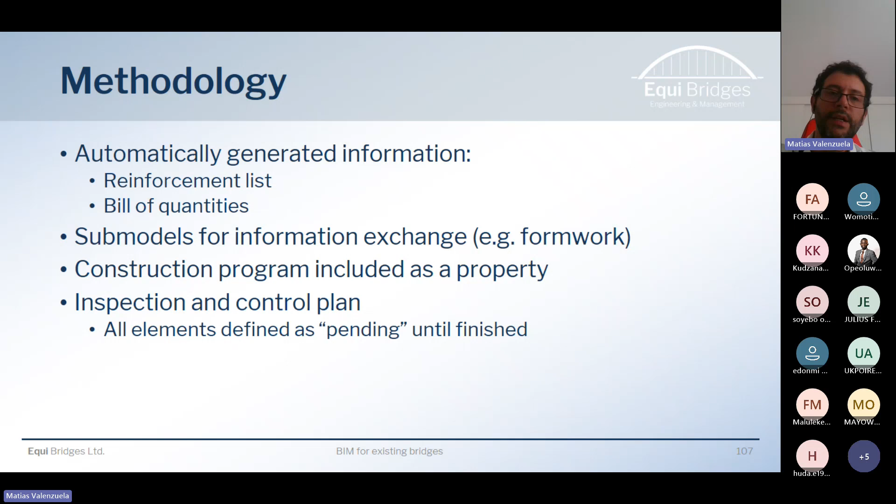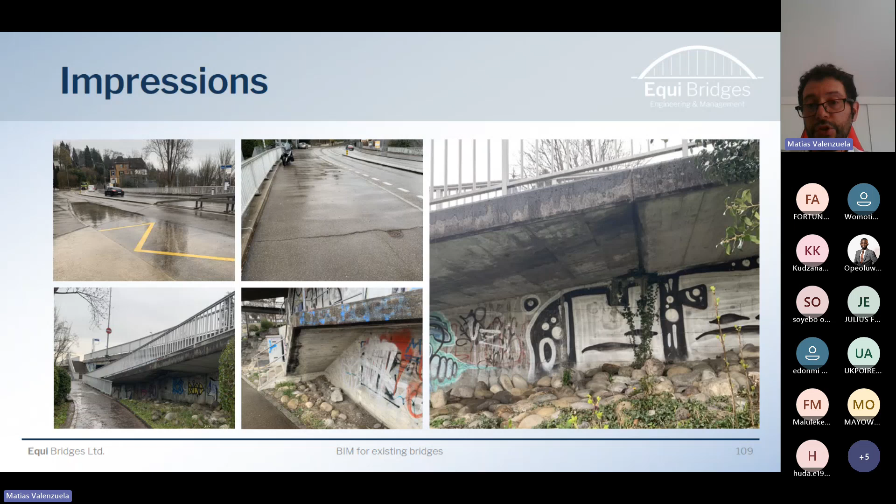Okay, just to finish this. Thank you, Fortune. This is another project, the Dufourstrasse bridge, close to Zurich. It's an urban bridge, and these are the first impressions of its condition. You can see a lot of damage problems, humidity, and waterproofing that is not done in the right way. In this case, the process for the preservation project considers preparation of basic data, design, and execution, and after that, how we can link it with the assessment.

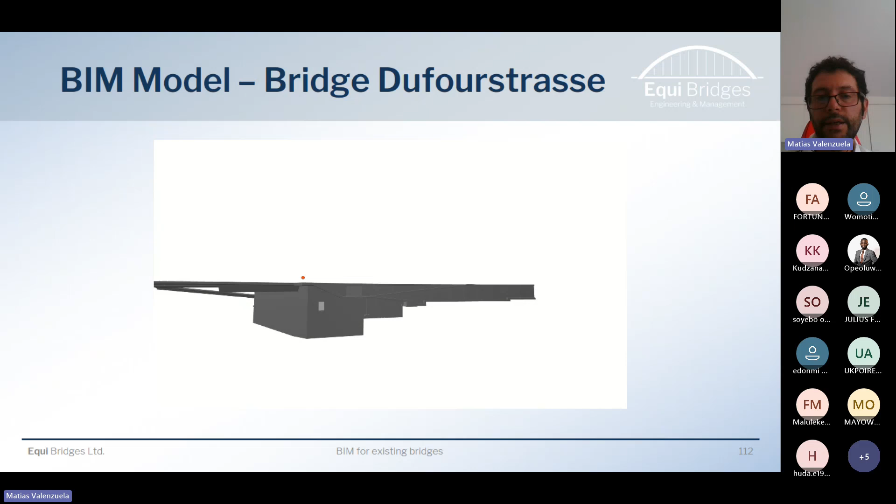In this case, we provide a BIM model, and this is not an easy structure because it's a gallery with a bridge, actually 2 bridges, and as an urban structure there are a lot of non-structural elements. The nice thing here is that you can use this to understand, from different points of view, all the elements that have to be considered.

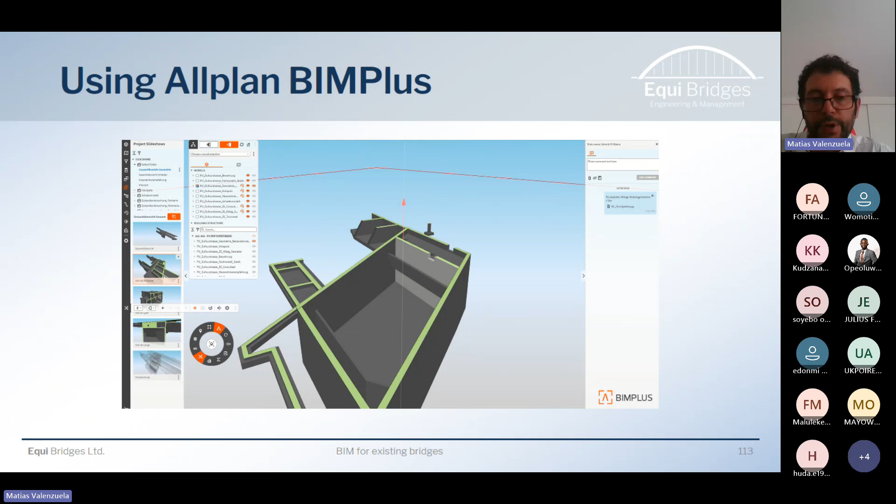Using Allplan BIM+, it's also very nice to understand and move through the structure in different ways. You can see transparency at different levels of the gallery or the bridge, which gives a very nice way to understand the whole structure. So you can see this use of BIM+.

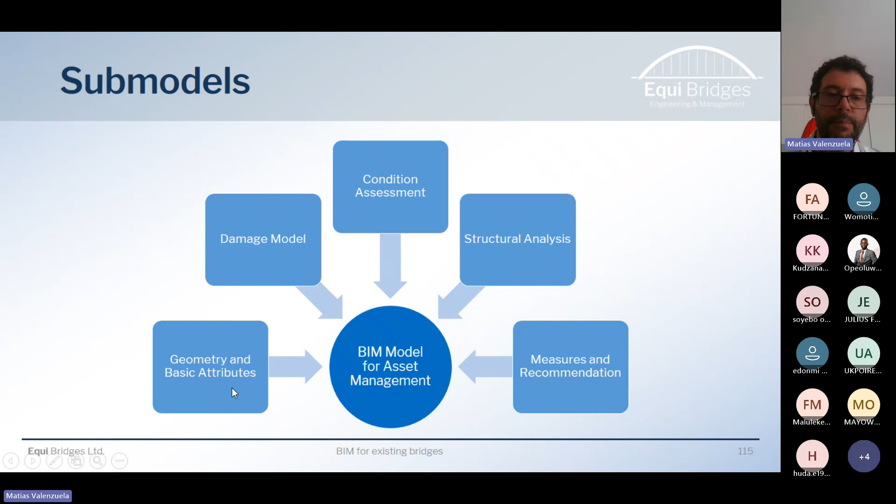So of course, the client provides some client specification. We use that specification, and with it, we create the BIM model for asset management using different models: geometry and basic attribute, damage model, condition assessment, structural analysis, and measure and recommendation.

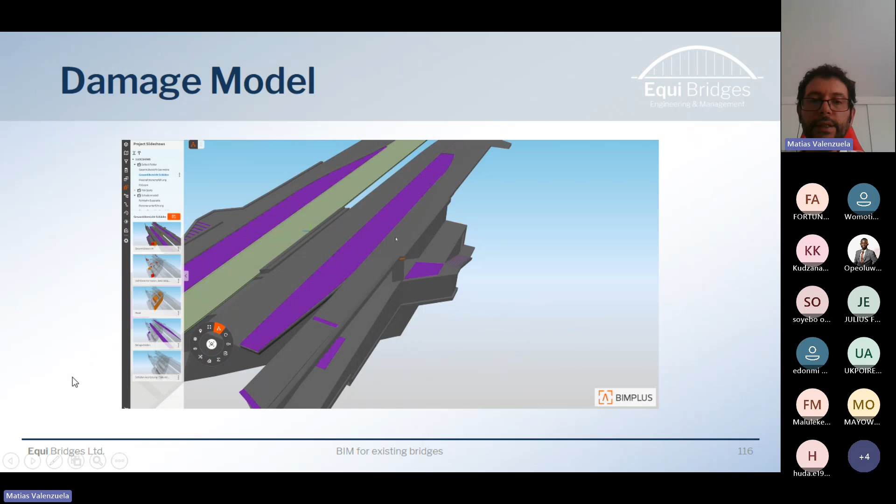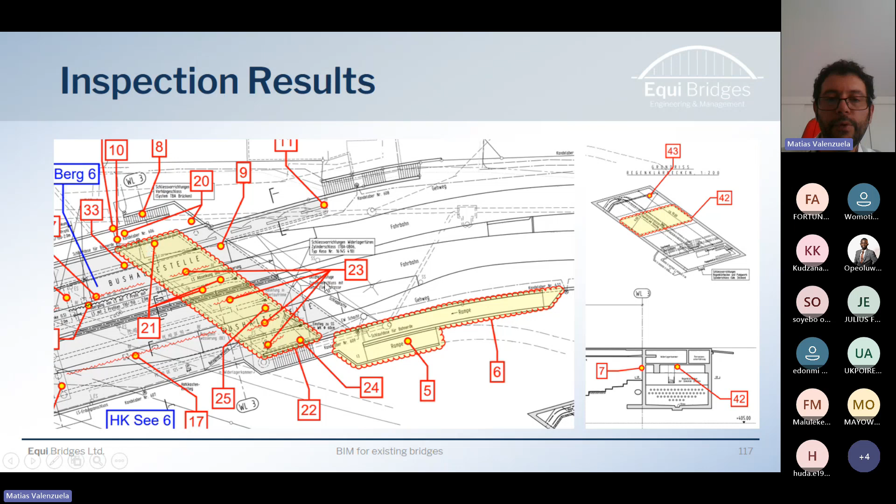For example, for the damage model, you can see here in different colors the data. If there's a problem of corrosion or cracking, you have different colors. For example, in the case of corrosion or waterproofing problems, you have the color blue, and so on. In that way, it's quite easy to understand. So this is normally what we consider to detect damage and show in a drawing.

So if you compare that with a 3D model, of course, the 3D model could be much easier. It's easier than the other way.

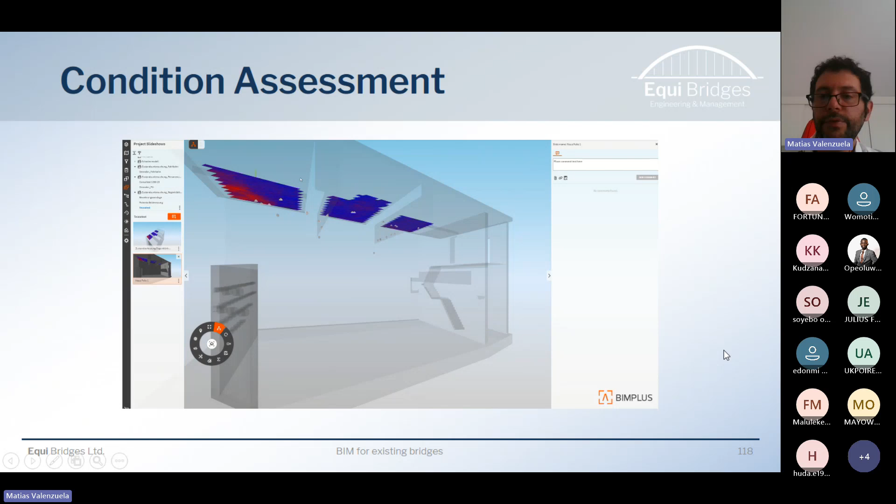Condition assessment is quite the same here. You have the frequency of damage in different slabs, and you can also include it. This is in a research process right now, structural analysis included in the model.

For example, in this case, you have a transverse beam, but that transverse beam is linked in a simple supported analysis with the main girder.

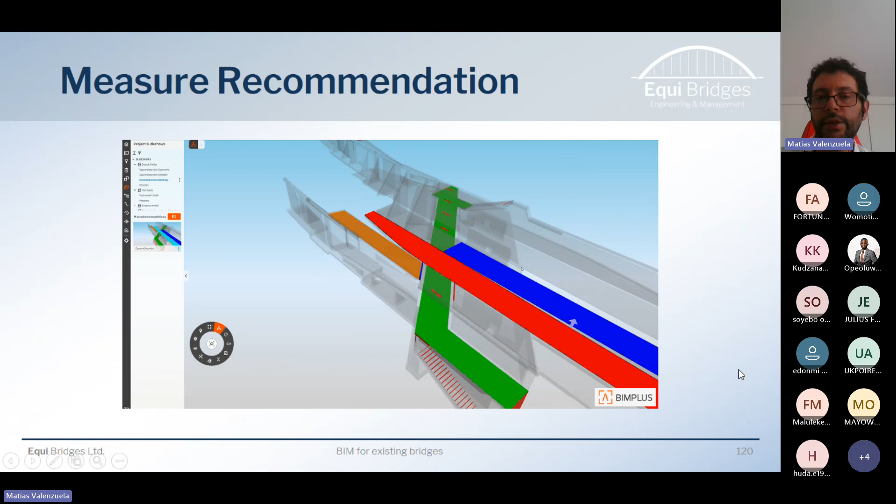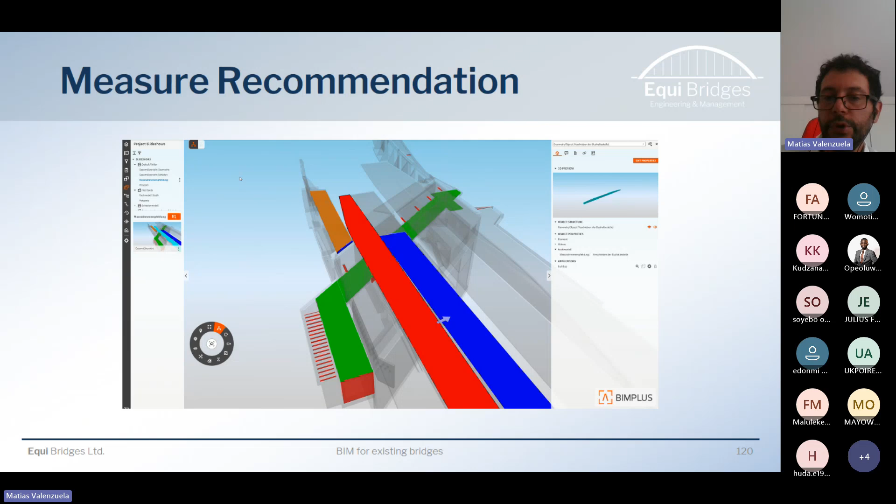And this is a measure of recommendation. Of course, after you finish the design and are preparing for the execution of the construction, you provide this model to define, for example, red color meaning you need waterproofing protection, or green color meaning, for example, you need to reduce corrosion, and so on.

So, final thoughts about all of this. First of all, BIM for asset management of complex infrastructure is something that I think is really, really important. Secondly,

We come from the side of construction, but right now digitalization is interdisciplinary. We need a lot of colleagues coming from different areas. If we are using BIM, digitalization probably means no information loss. So that is an important thing.

And the future technologies, future and present, could be LIDAR, 3D scanner, augmented reality, virtual reality, and of course sensors and instrumentation.

So that was my presentation. Thank you very much. My name again, Matias Valenzuela, and there you can see my email, matias.valenzuela@pusb.cl. For any kind of research you need, that's my home, the university, and of course Equi Bridges if you need any kind of support in specific technical design construction. Okay, thank you very much again, and I'm open for your questions.